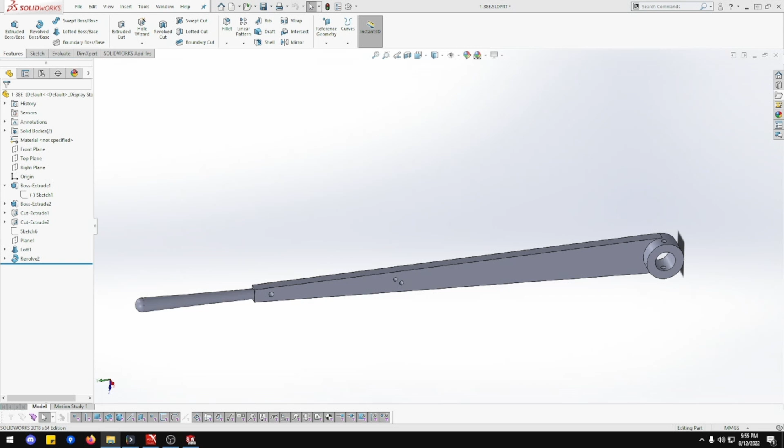Welcome. This episode we're going to be building part 1-38E reverser arm for the Clayton Undertype steam wagon. Let's get building.

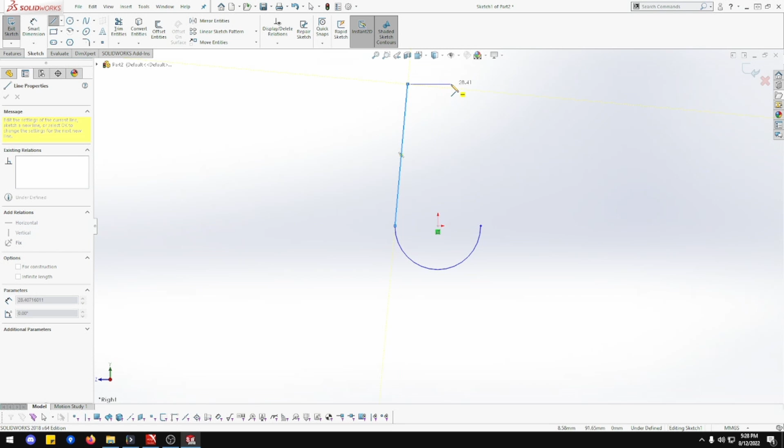So first off, we want the center point arc that can go there to there. Then we're going to do a line, there, there. There's no set length this time on that. That's fine, just doing the basic layout. This cylinder is going to be 22. Oh, sorry, 11. Diameter's 22, radius is 11. There we go.

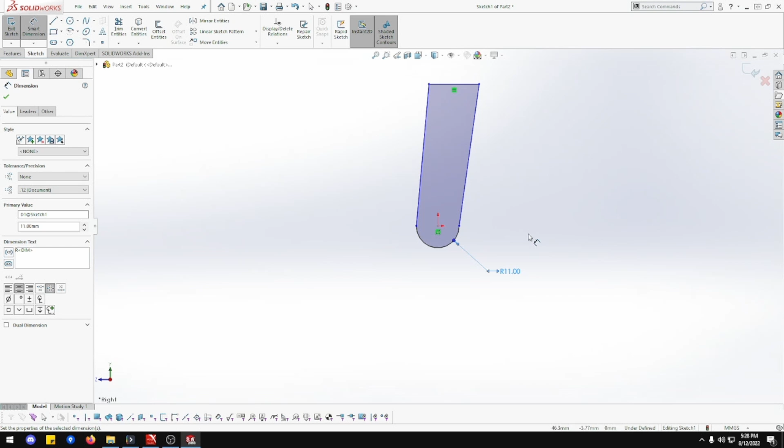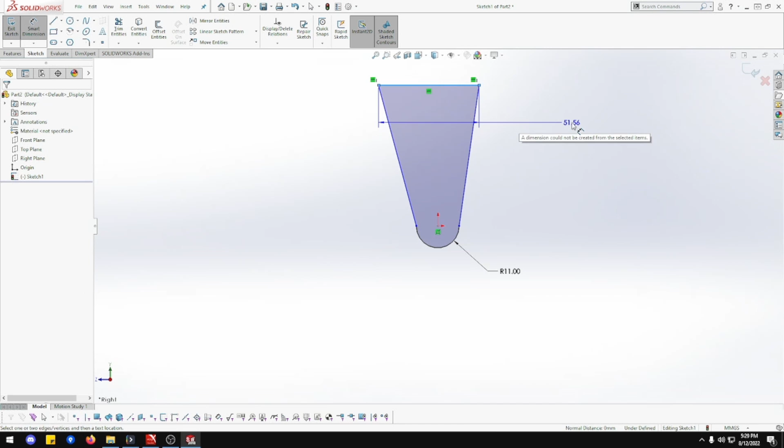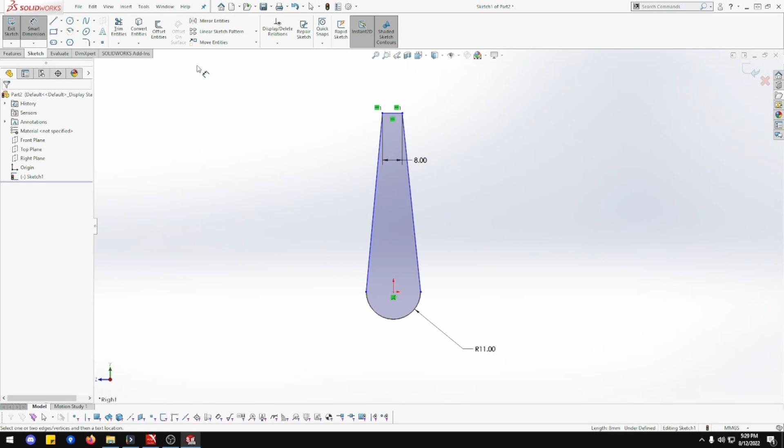Still in dimension, pull that one over. Okay, these two are going to be horizontal. Now the space between that is going to be 8. And yes, it's going to be straight down. Let me just grab this one, bring it across, zoom in there. Another way I can do it is smart dimension that point to the center there. It's going to be 4. So now that should not be able to go that way, but go up and down.

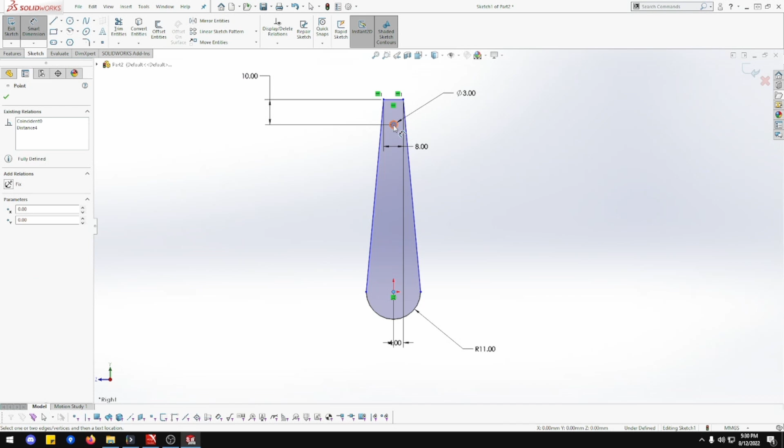So now we got from this point to the hole up here. 3mm hole there. Smart dimension, that's going to be 3mm. I'm just going to put a default one here at 10, so that way when we extend this up, that's staying there. Center to center, it's going to be 158.3 plus 73.7. There we go. Actually, it's about the correct size. Grab that, just get it away. It doesn't matter for technical drawings, I just like to do that. It keeps it neat for yourself.

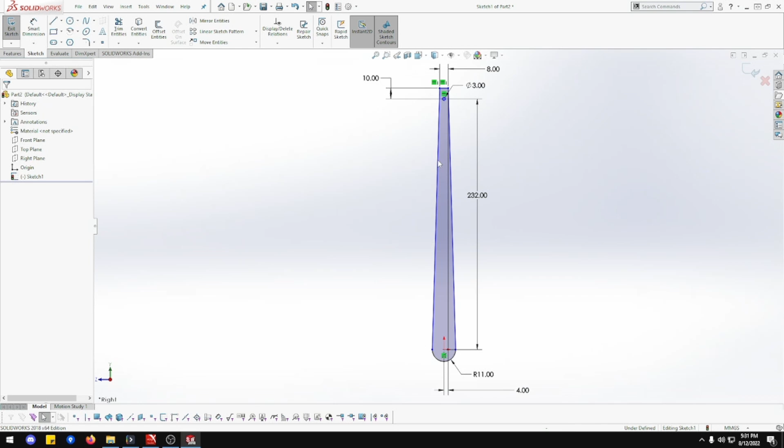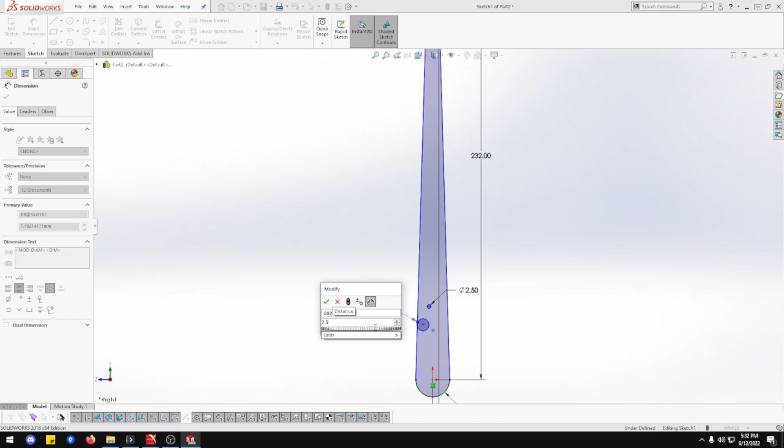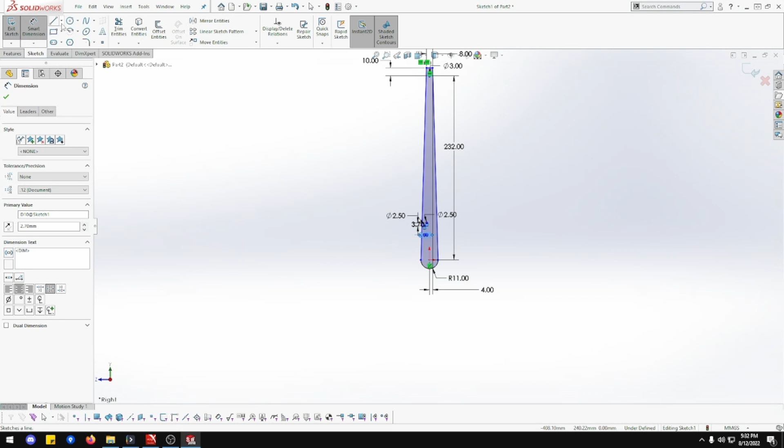Okay, so we got 2 holes up here somewhere. I'm just going to put them down here for now. They are 2.5 diameter. Smart dimension. From this one to that one is going to be 3.7. That one to that one is going to be 2.7. Okay, we need to put a center line in this. If we'd done the center line before, we could have done the 4 mil up there.

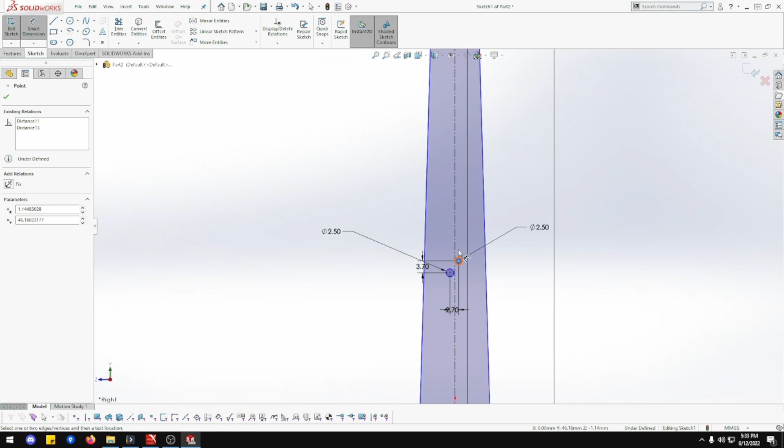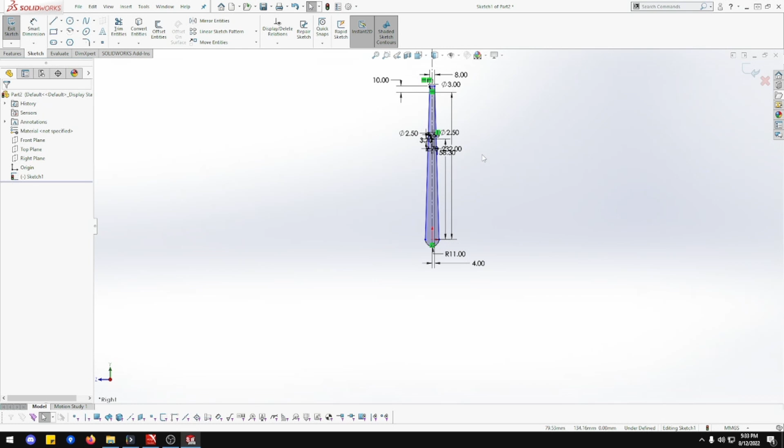Let me bring that across. One each side so we get the correct measurement. Smart dimension, center of the circle to that line is going to be 1.6. The reason I've done it close down there, I can do it from here. This center line to that center line is going to be 58.3. It goes up there then. That looks like everything. Now that is 6 mil thick, so extrude 6 mil. Beautiful.

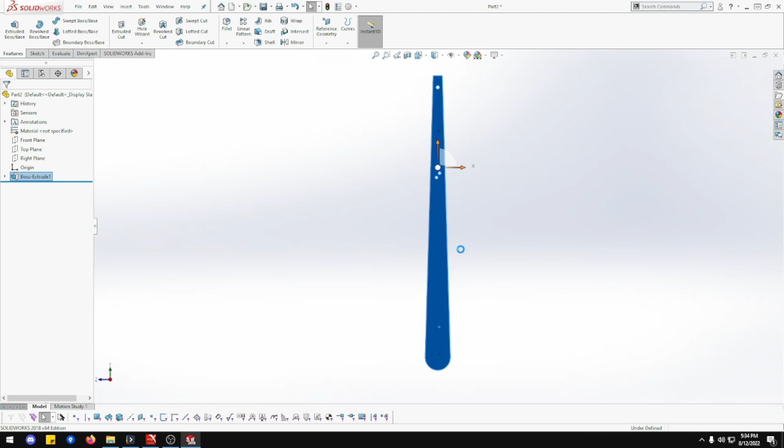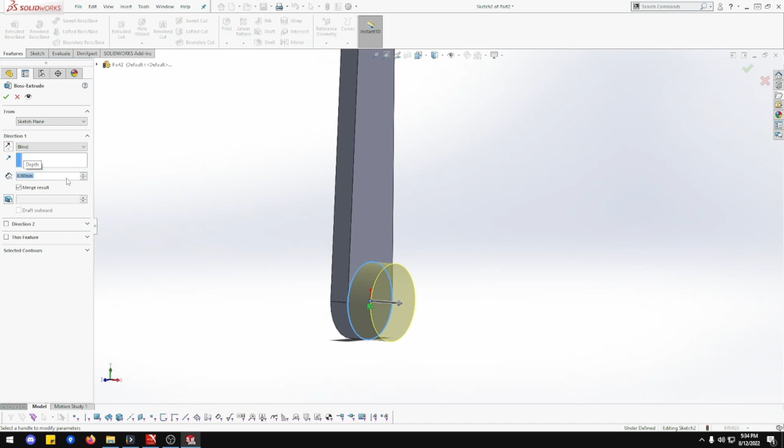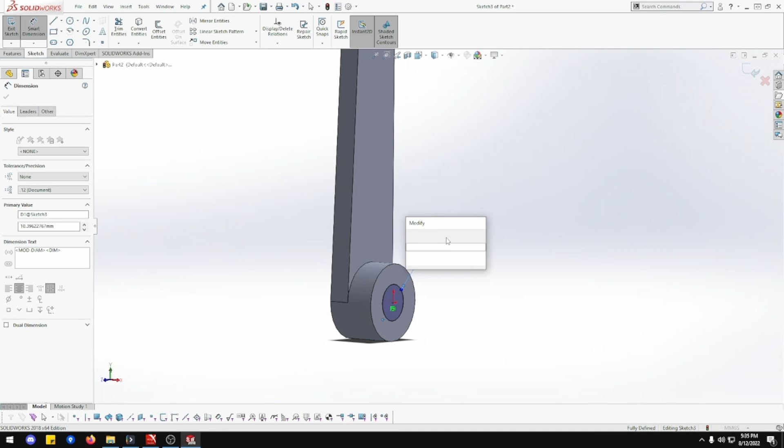So we want this face here, normal to, sketch, circle, that size, and extrude 8 mil. This needs a hole through it though. Sketch, circle, smart dimension, that's going to be 12 mil. Extrude cut, through all, and done. Let me save this before I forget. This is part 1-38E. Always remember to save and save regularly.

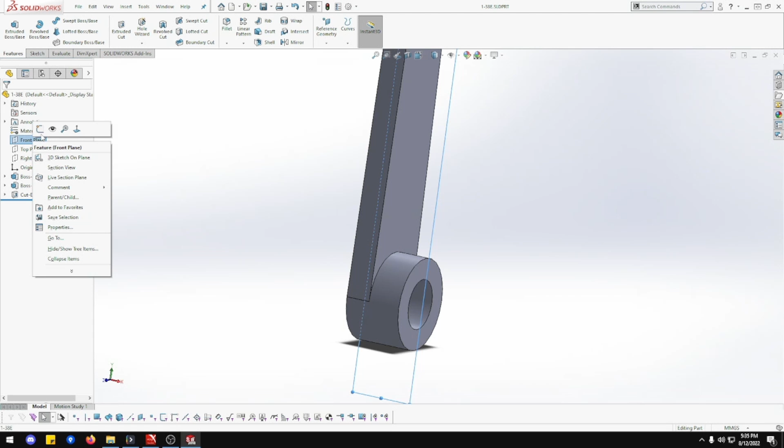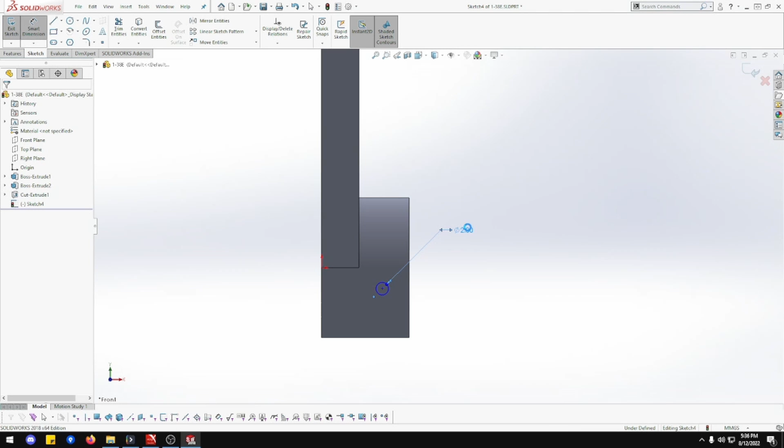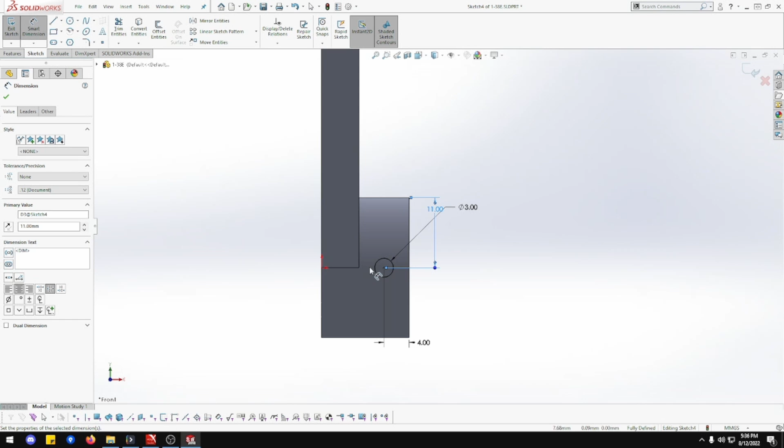Now we want front plane, normal to, sketch, zoom into this section. There's a hole goes through here, that's why I've done front plane, so we got it straight. It's going to be a 3 mil circle, halfway through, so 4 mil in. This line to that line is 4, and there to there is 11. Now feature, extrude cut, through all, second direction through all, and done. There it is.

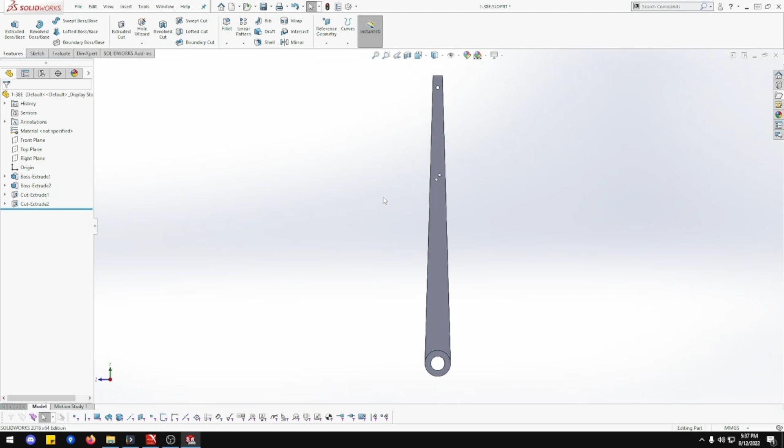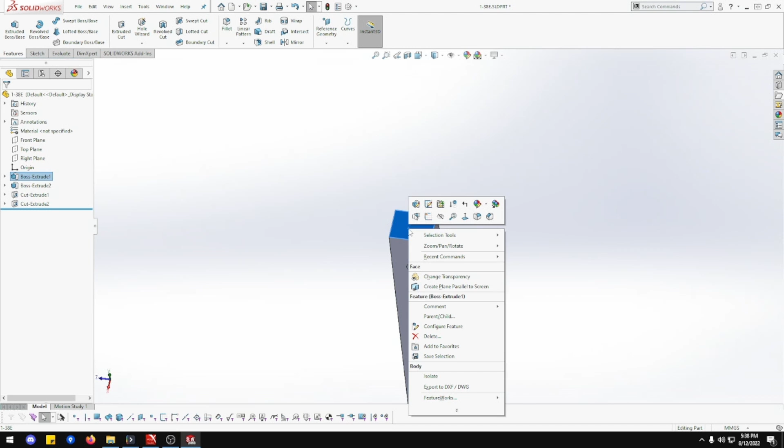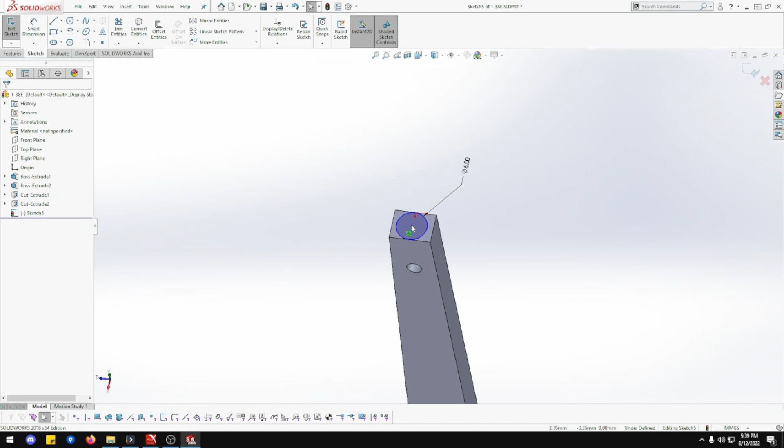Okay, so this, let's do sketch on that one. It's going to be a circle. Smart dimension will be, what was it? 6. Let's move that there for a minute. That one, the other edge and that edge should be there. Beautiful. That's center to, oh, 1 point. Go there.

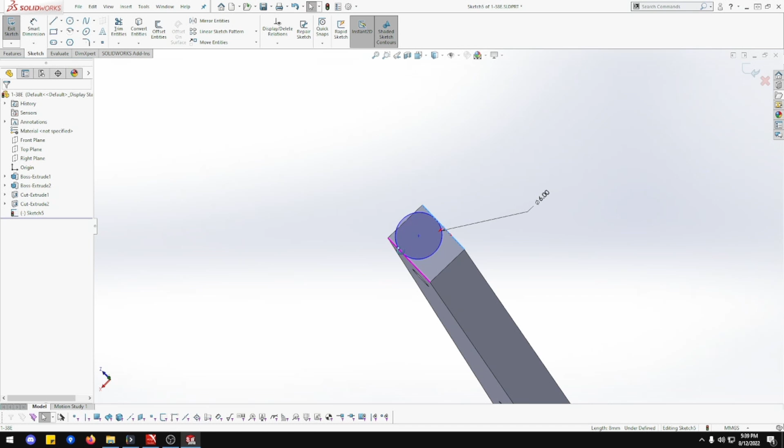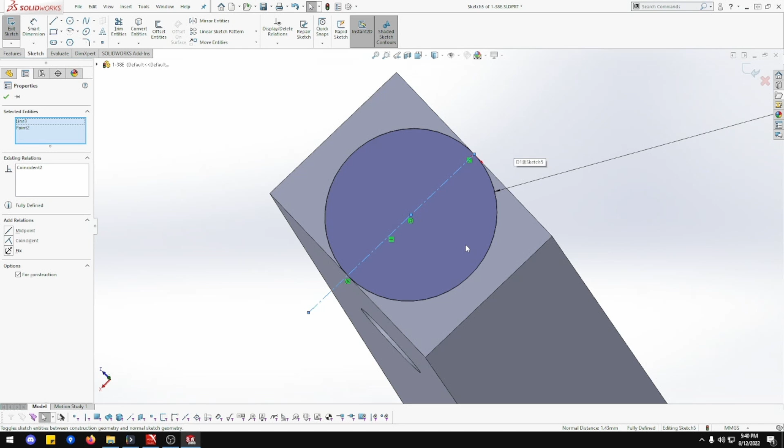I get 0.0. Not working. Okay, let me go to center line. Let me just do it with that parallel that way. That way it's locked in. That's 90 degrees there. You got the symbol there. Now this dot center there to that line will be coincident. There you go. That's where we want it. It lines up perfect there because it lines up with this one. That's the same width. So that's that one done. Let me just okay that.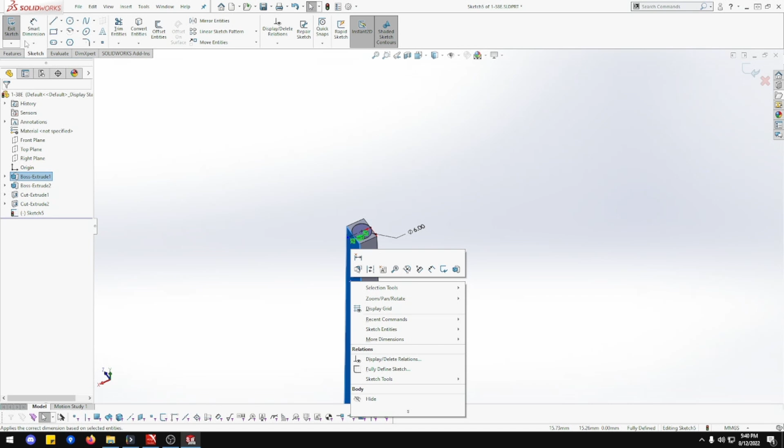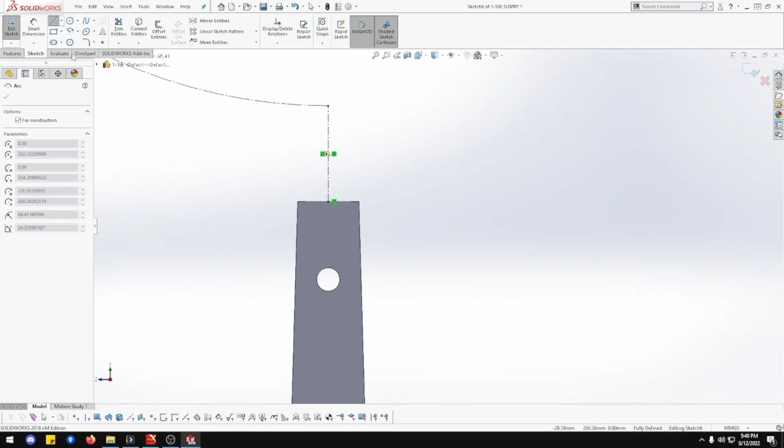Through there. Not through there. Zoom out. Now we want to do a plane that's going to be 66 high. So let me actually go to sketch. It's going to be normal to. Actually, it's going to be right plane sketch. So we want center line, that point there. Make sure it's vertical. That's going to be 66. Sorry, I had the wrong 3. That's going to be 66 high. Okay, so let's exit out that sketch.

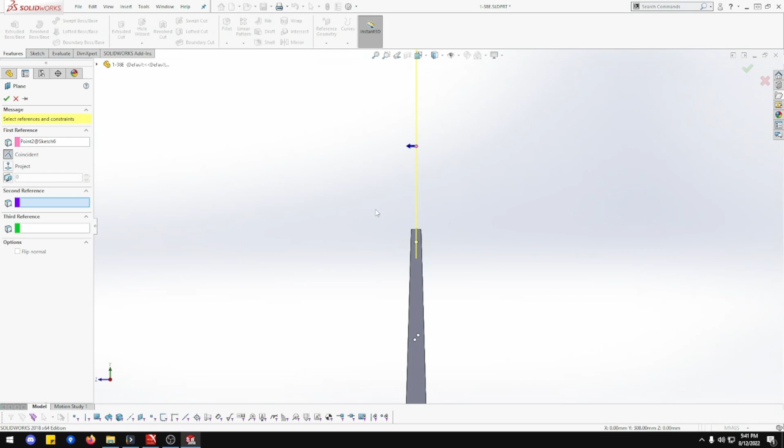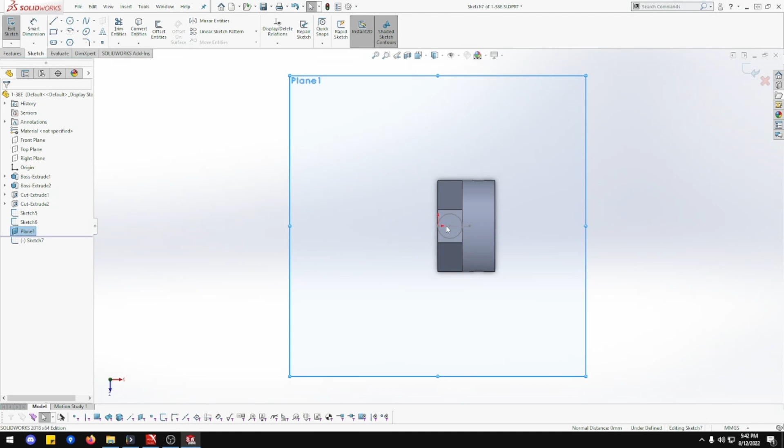Let's go to plane. Pop it on that one. Second reference. Will that work? If I click on that one. Should be, yep, that's it. So I clicked on the endpoint, then clicked on that line, made it level the way we want it. That's good. Okay, so now on this plane, normal to, sketch, and we can line up with this circle perfectly. Nice. So circle center point. Radius 4, so it's going to be a diameter of 8. Beautiful, that's done. Exit sketch.

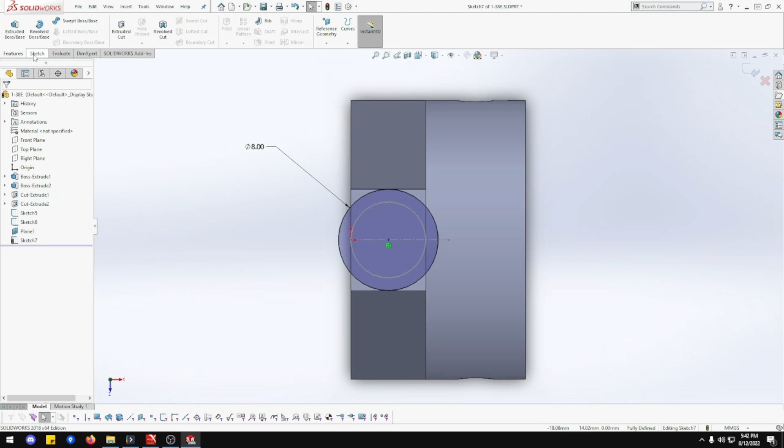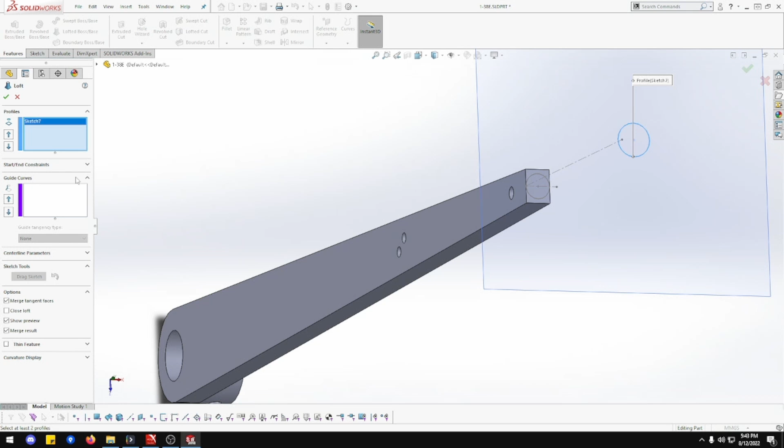Now we want to go to feature. Swept boss base. Oh, we already had that selected. Oh, no. Sorry, that's the wrong one. We want loft base. Let me just unhighlight it. We want loft base, because that one there does along a path. We don't want the path. We want that one and that one. Don't need guide curves or anything. It's going to be straight. There we go. That worked out a lot quicker than I thought. Okay, but we want this curved here.

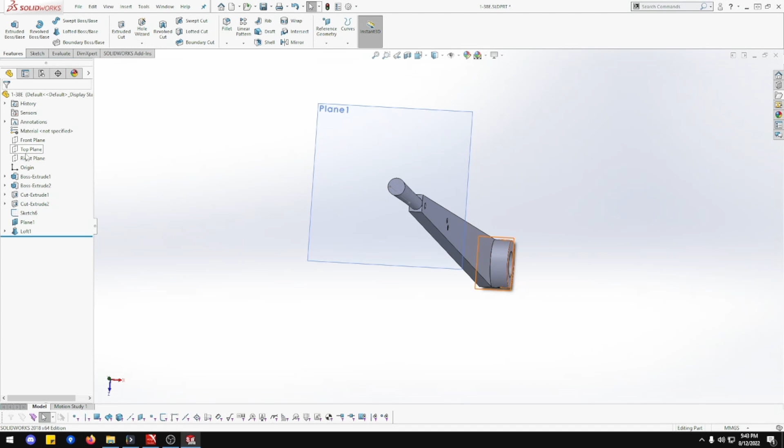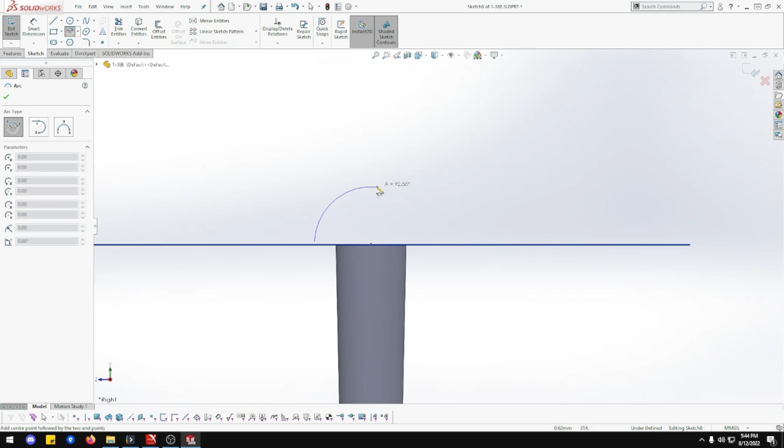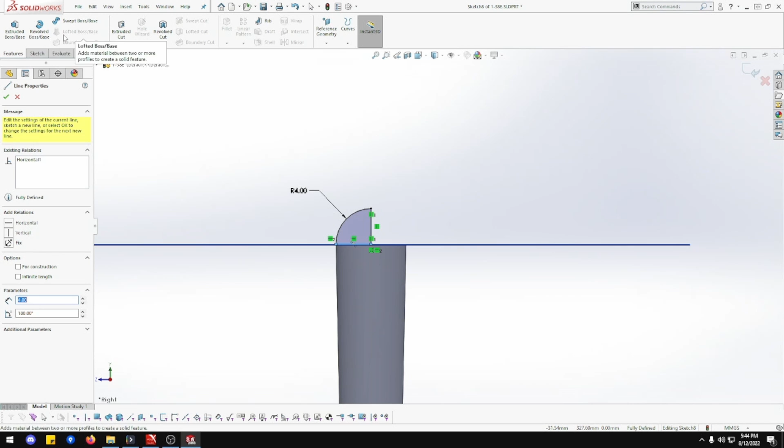So let's go to right plane, normal to, sketch. We want to go to center point arc. In the center, to that. Let's put it there for now. Now do smart dimension. That's going to be a radius of 4. That point there is going to be vertical. This point and this point are going to be horizontal. Line. Now close that in, so that should be a closed shape. Now we want to go to feature, revolve boss base. Okay, it's revolving around the wrong one. Want around that one.

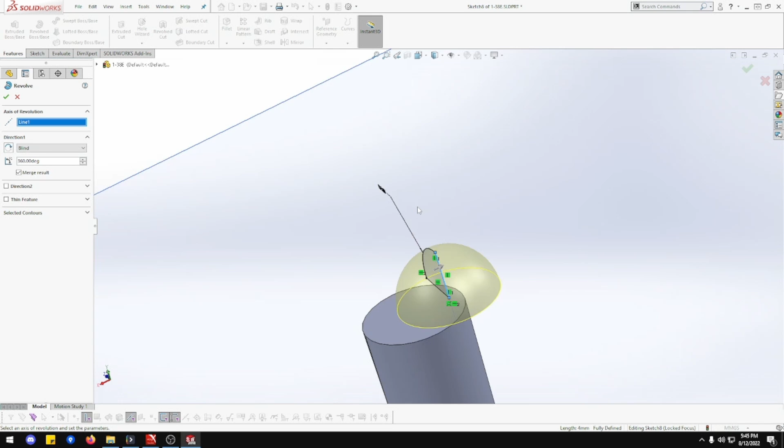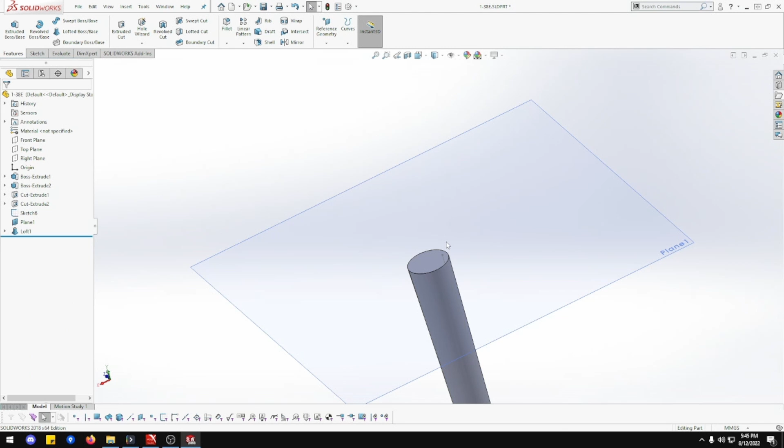Oh, dang, I was off. I got the wrong plane. Okay, that's fine. Exit out of that one. Let me just delete that one. Oh, exit out of sketch. You can't delete what's in there. Let me just delete that one. Okay, I'll go back, change it. Let me just hide that one out of the way, and that one, and that one. We don't need that. But this one here we do need.

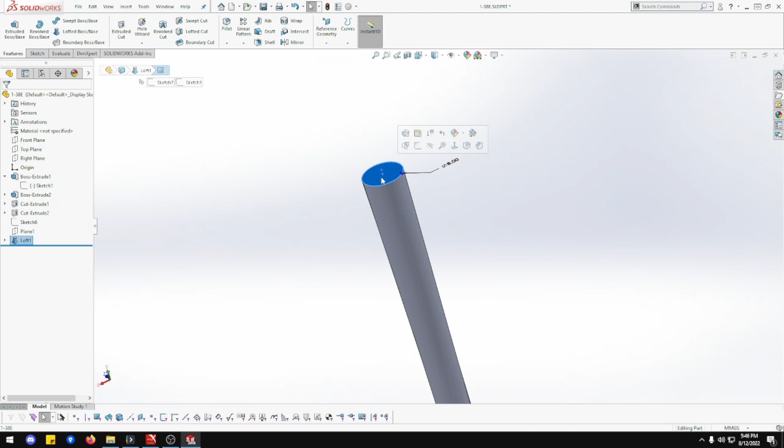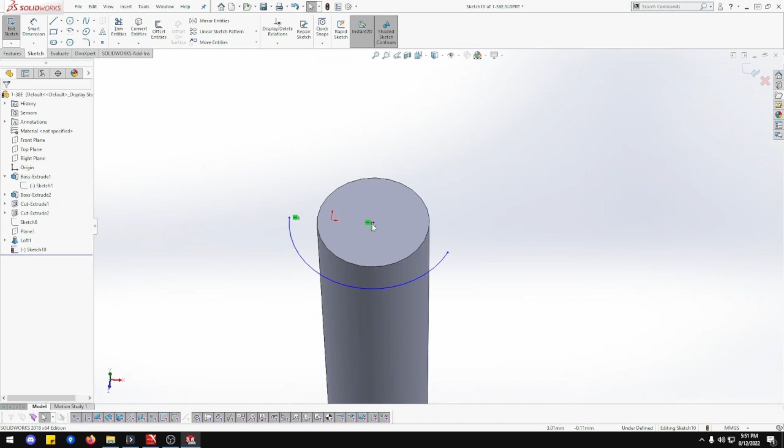Okay, so we're going to try this way. We're going to go to sketch. We're going to do half for the 3.1. Let's go that way. These 2 points are going to be horizontal. Then that one's going to be vertical. There we go. Now, let me just join these lines up. That line to there. That line there. Now we want to smart dimension. That's going to be 8. Sorry, it's going to be 4.

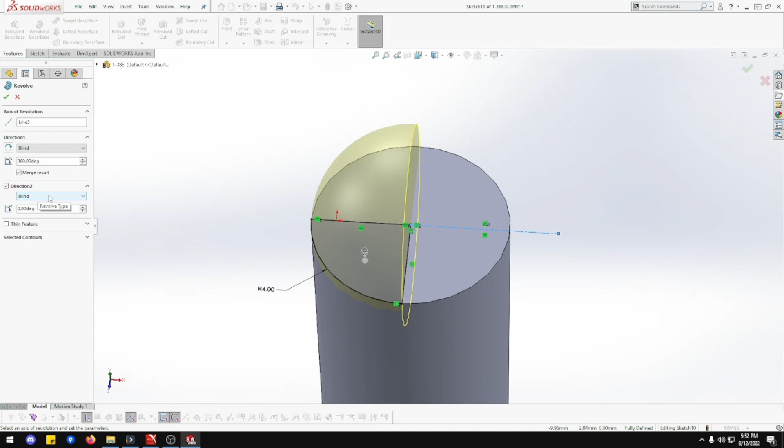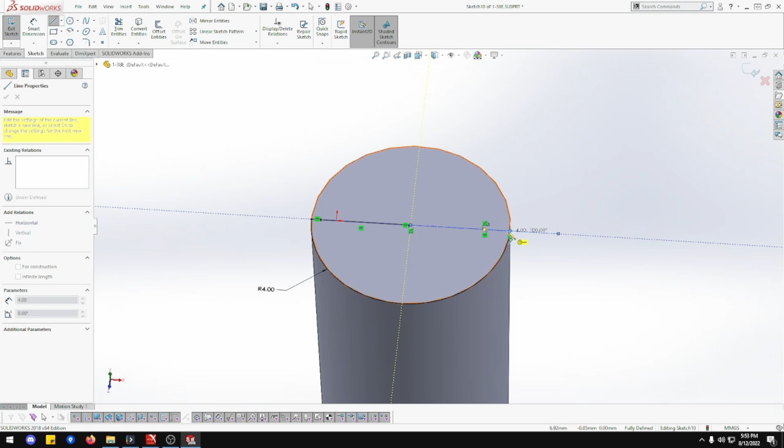Now we go feature, revolve. That's construction line through there. Feature, revolve. Direction 2. Hold on. Go back one. Let's delete that line. Let's bring this one. That line's going to be coincident. Beautiful. Let's go to line. Close that one in. Feature. There we go. And done. It seemed to work then. That's the handle there. It pulls down. So that piece is done.

That's part 1-38E Reverser Arm.